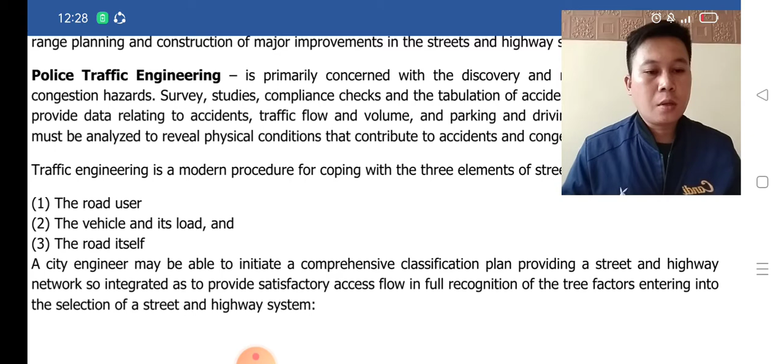A city engineer may be able to initiate a comprehensive classification plan providing a street and highway network so integrated as to provide satisfactory access flow and full recognition of the three factors entering into the selection of a street and highway system. So para magkaroon ng magandang plano para makadaan yung ating mga motorista, mga pedestrian, and the people surrounding on the city or the municipality, so kinakailangan pinag-aaralan ng city engineer.

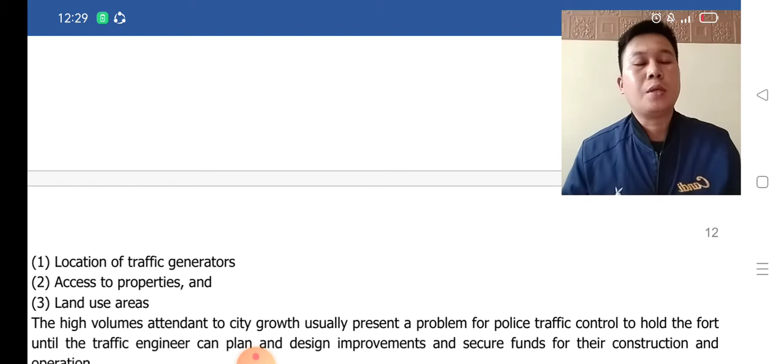Okay, meron din tayong selection. Okay, number 1 is location of traffic generators. So, titingnan natin kung saan yung may mga daanan na marami ang mga traffic. Access to properties. Okay, access to properties. Land use areas. Okay, land use areas kung saan pwede makadaan yung ating mga sasakyan, mga tao.

The high volumes attendant to city growth usually present a problem for police traffic control. Of course, kapag maraming tao sa isang komunidad o sa city, maraming tao, so maraming traffic. Malakas ang traffic. Until the traffic engineer can plan and design improvement, as sinabi natin kanina, na gagawa ng mga diversionary roads para makadaan yung mga sasakyan in a smooth way.

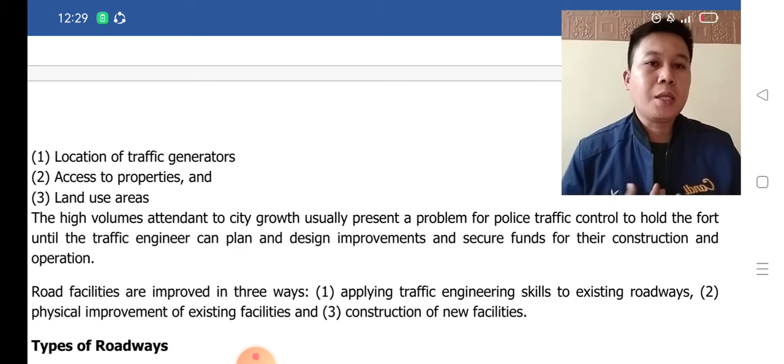Okay. Road facilities are improved in 3 ways. So, meron tayong 3 ways para ma-improve ang ating road facilities. Applying traffic engineering skills to existing roadways. Physical improvement of existing facilities.

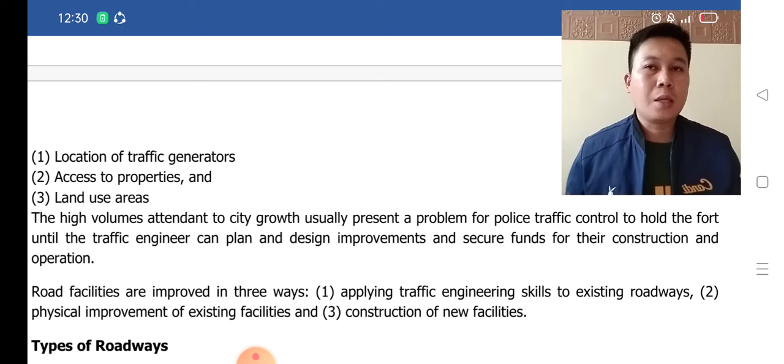Okay, we have types of roadways. The function of local street is to provide access from a collecting street to abutting land and properties. So, di ba, ang function ng local street is para makadaan yung ating mga sasakyan, yung mga tao.

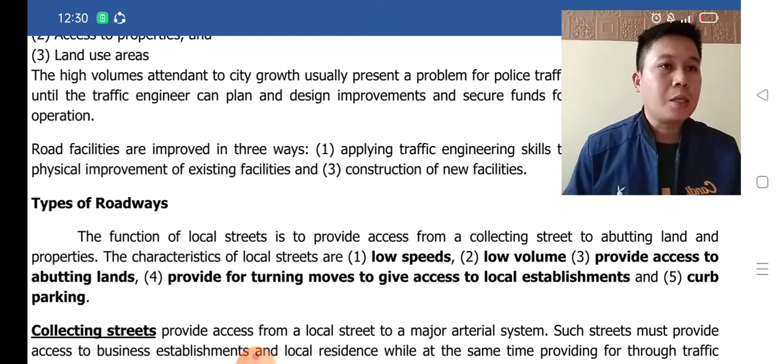The characteristics of local street are low speeds. Di ba, yung mga roadways, low speeds, hindi dapat mabilis dahil maliliit lang yung daanan natin. Low volume, maliit lang yung dumadaan. Provide access to abutting lands. So, nagiging daan siya para makadaan dun sa malalaking daanan.

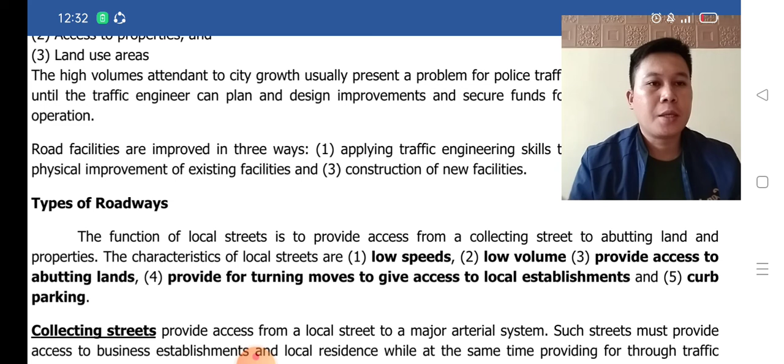Okay, abutting land is yung mga connected na mga daanan kung saan magkakatugma-tugma. Provide for turning moves to give access to local establishments. Okay, di ba? Curb parking.

Okay, we have collecting streets. Provide access from a local street to a major arterial system. Di ba? Meron tayong mga magkakadugtong-dugtong na mga street, daanan. Such street must provide access to business establishment and local residents while at the same time providing for through traffic movement and more efficient operation than local streets.

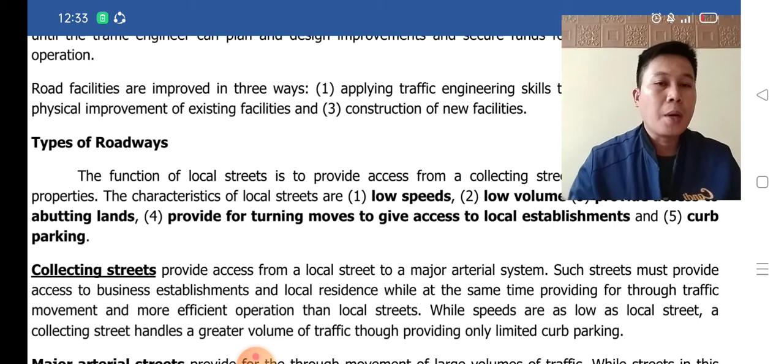While speeds are as low as local street, a collecting street handles a greater volume of traffic though providing only limited curb parking. So, di ba kapag dyan sa mga street na yan is walang mga nakapark na sasakyan, madaling pwedeng dumaan doon, maging diversionary doon, makadaan doon yung ating mga motorista.

Major arterial streets provide for the through movement of large volumes of traffic, di ba? Nagiging daanan sila, while street in this category may serve abutting property. The primary purpose of this roadway is to provide uninterrupted movement of a high volume of through traffic. They are characterized by access control and no parking.

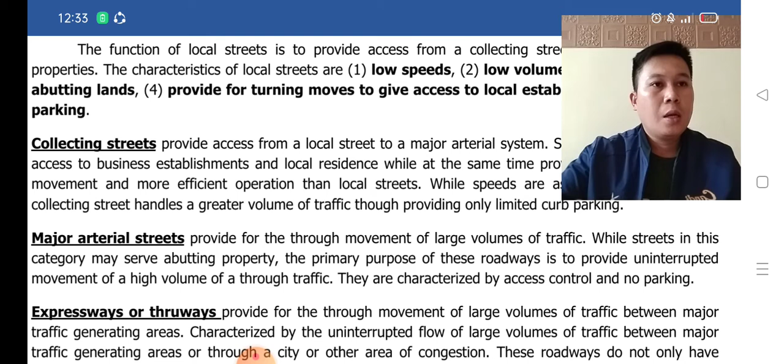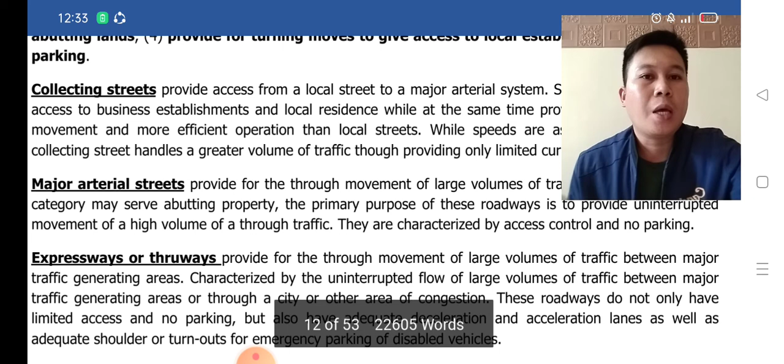Okay, expressway or thruways. Expressway makikita niyo sa Manila. Provide for the through movement of large volumes of traffic between major traffic generating areas.

Characterized by the uninterrupted flow of large volumes of traffic between major traffic generating areas or through a city or other area of congestion. These roadways do not only have limited access and no parking. You should not just be able to pass there without permission.

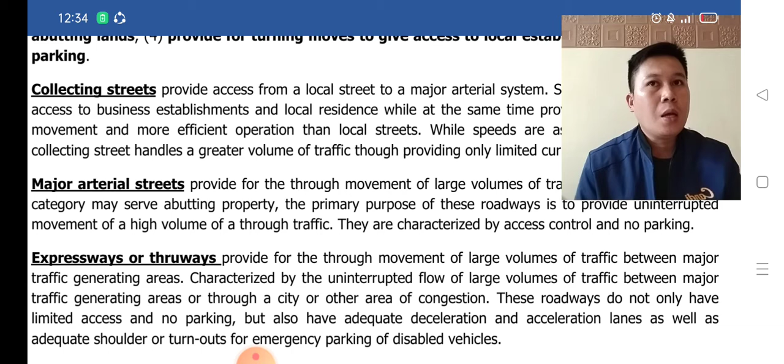Halimbawa nito, yung mga expressways sa paakyat, may term ito. So meron itong term, I don't know kung alam niyo pero tag dito. An acceleration lane as well as adequate shoulder or turnouts for emergency parking of disabled vehicles.

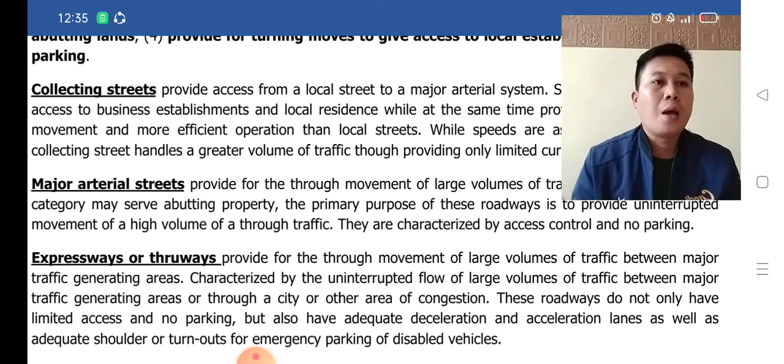So mga expressway natin sa Manila, kung saan makikita niyo may mga maraming daanan, halimbawa meron tayong NLEX, merong SLEX, northbound, papuntang north, papuntang south expressway. So yun yung mga ginagawang daanan para maging mabilis yung traffic flow.

We have capacity criteria. The definition of capacity is a generic expression pertaining to the ability of a roadway to accommodate traffic. Diba? So merong mga instances, may mga lugar kung saan limited access, limited lang yung nakapasok na sasakyan. Okay, it can be dahil may toll gate, for example.

Capacity criteria must also include the speed of vehicles. So kung gaano kabilis, ang pwedeng limited halimbawa kasi may mga area na di ba makikita niyo sa mga municipality natin na 30 km per hour kasi nga maliliit lang yung daanan. So pwede magkaroon ng accident, mabangga yung mga tao.

Spacing between vehicles, okay, yung spacing, the relative interference between vehicles, as well as the number of vehicles that can pass a point on a roadway in a specified period of time.

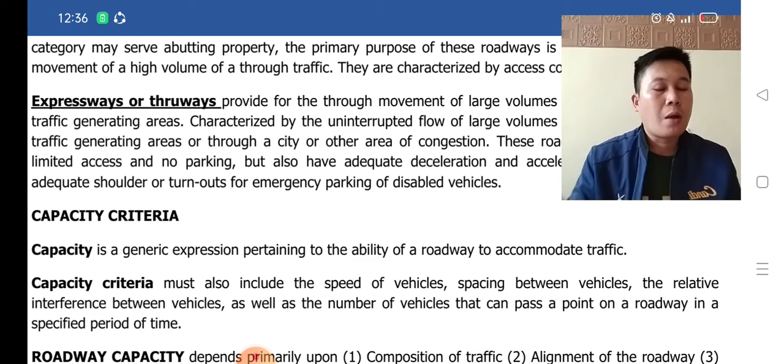So kinakailangan, dapat, ang halimbawa nito is, ang Iligan City, makikita nyo yung mga signal lights, tawag dito, ang layo ng mga signal light dyan sa mga national highway is 200 meters for example. So doon nakita nila yung capacity criteria. So nalilisen yung traffic, hindi nagkakaroon ng pagkabuhol-buhol.

Roadway capacity depends primarily upon composition of traffic. So nakadepende ang roadway capacity, yung makakadaan sa mga daanan na yan, sa composition ng traffic. Kung ano yung nandun sa paligid ng lugar.

Halimbawa, alignment of the roadway. Straight ba ito? Maganda ba itong daanan? Hindi siya bakod-bakod.

Number and width of lanes. Kung ilang lanes ba yan? 4 ba? 3 ang magkasya.

Speed of vehicles using the roadway. So kung gaano kabilis yung sasakyan. Dahil kapag hindi mabilis yung pag-usad, so expected, matagal sila, matatanggal dun.

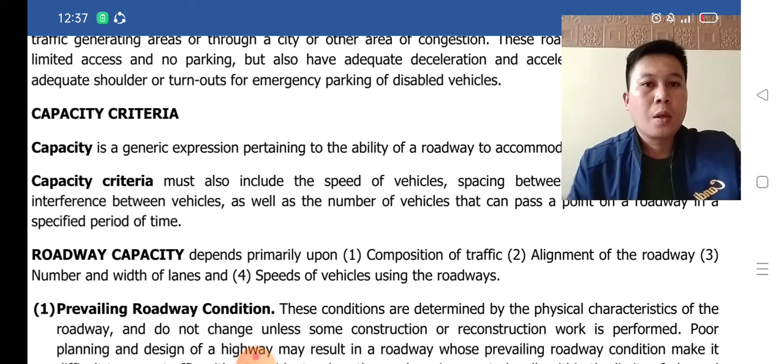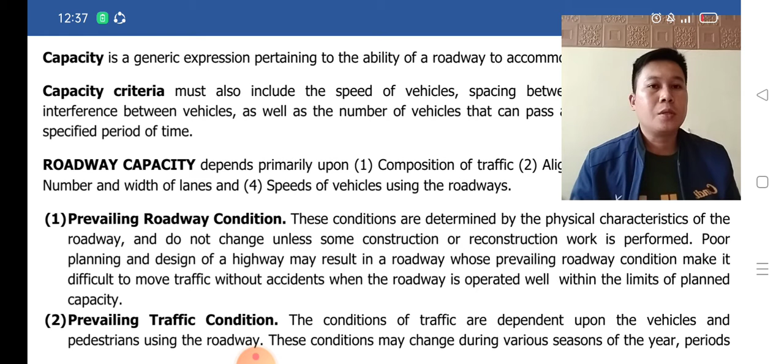Okay, we have prevailing roadway condition. These conditions are determined by the physical characteristic of the roadway. Kung ano, di ba makikita natin may mga zigzag, may mga rough, tawag dito, sirang-sira yung sasakyan. So nagiging dahilan dun yun sa pagbagal ng sasakyan, pag-usad ng sasakyan.

And do not change unless some construction or reconstruction. So yun ang tawag dun.

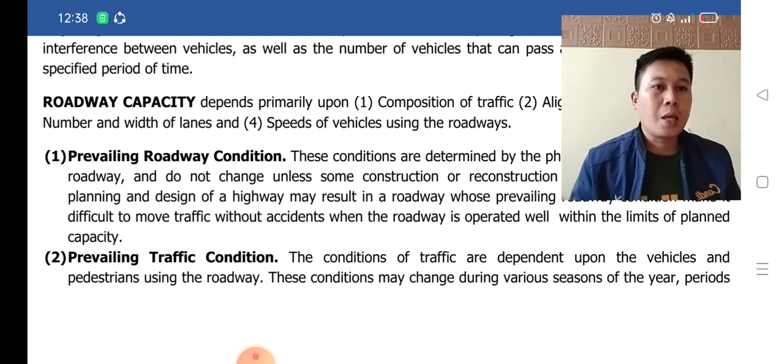Prevailing traffic condition. The condition of traffic are dependent upon the vehicles and pedestrians using the roadway. So kung maganda yung pagdaan ng mga sasakyan, ng motorista, ng mga drivers, pedestrian, so maganda yung flow of traffic. Kapag naman hindi sila magkaunawan, for example, nagbabiolate sila, so ang nangyayari nito is nagkakaroon ng traffic congestion.

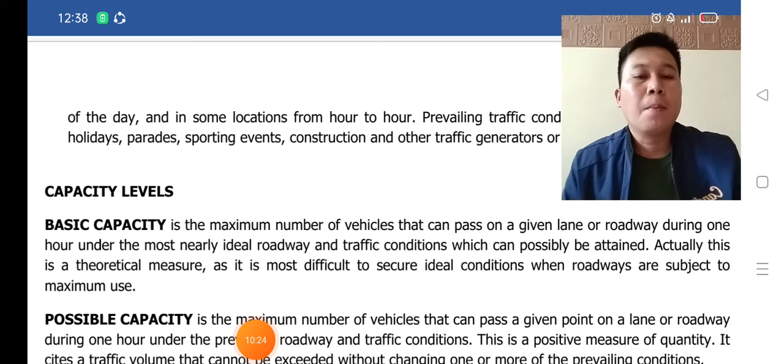We have capacity levels. So mayroong mga daanan na may capacity levels. Basic capacity is the maximum number of vehicles that can pass on a given lane or roadway during 1 hour under the most nearly ideal roadway traffic condition which can possibly be attained. Actually, this is a theoretical measure as it is most difficult to secure ideal conditions when roadways are subject to maximum use.

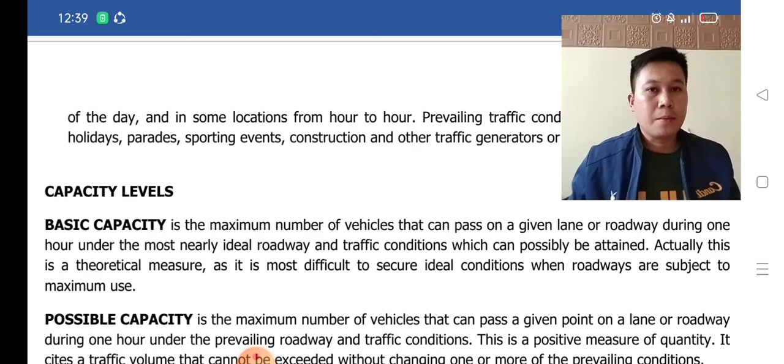So di ba, mayroon tayong mga daanan na kinakailangan, sabi ko sa inyo kanina, inaalam natin kung ilan lang dapat na makadaan dyan in a certain hour. Dahil doon natin makikita kung paano natin ayusin, i-construct o paano natin dadagdagan yung capacity ng roads. For example, mag-build tayo dyan ng ibang lanes, di ba?

Possible capacity, ito naman yung possible capacity is ano yung pupwedeng tawag dito, pupwedeng makadaan doon. For example, di ba kapag may mga daanan na hindi maganda, for example, hindi makapal yung semento, so hindi pwedeng dumaan dyan yung malalaking sasakyan dahil pwedeng masira.

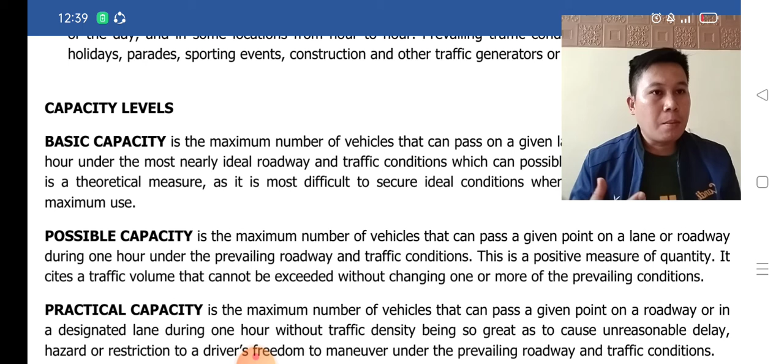Halimbawa doon sa mga bridges, tapos pinadaan mo dyan yung tonelada, bigat, tapos biglang masira, mag-crack. So yun. Practical capacity is yung given na kung ano yung dapat katamtaman, so yun lang ang pwedeng allowed.

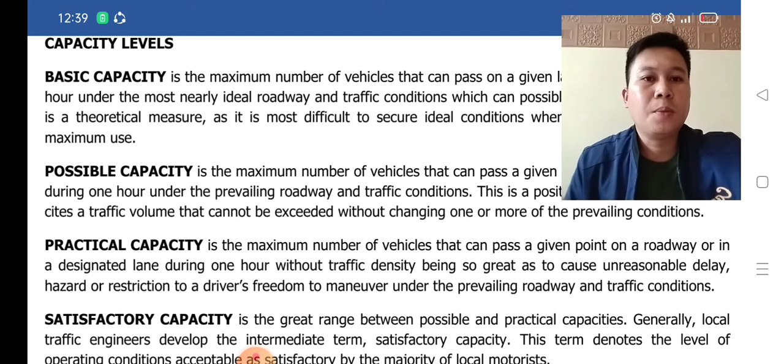Satisfactory capacity, yung mga term of satisfactory capacity. The term denotes the level of operating condition acceptable as satisfactory by the majority of local motorists. So kung ano yung acceptable, satisfactory, halimbawa capacity ng daanan, so dapat doon duman, hindi yung halimbawa napakalit ng street natin, halimbawa 2 lane, tapos doon lang pinapadaan, close halimbawa yung isang daanan so kinakailangan mag-create na kapag 2 lane, ito yung expected na dadaan, ito yung expected na mangyayari.

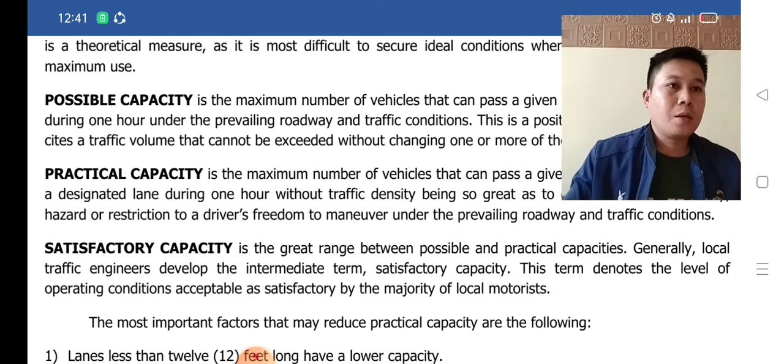Kapag hindi nag-create ng mga diversionary road o kaya hindi gumawa ng plano ang isang community, ang isang city kung saan halimbawa yung papuntang Iligan, halimbawa papuntang Cagayan, so may mga diversionary road, for example, na pwedeng gamitin ng mga sasakyan, ng mga motorista para hindi sila ma-traffic doon sa mga lugar. Kung makikita nyo sa Iligan City, napakaganda ng mga daanan dahil may mga intersection, makikita natin doon.